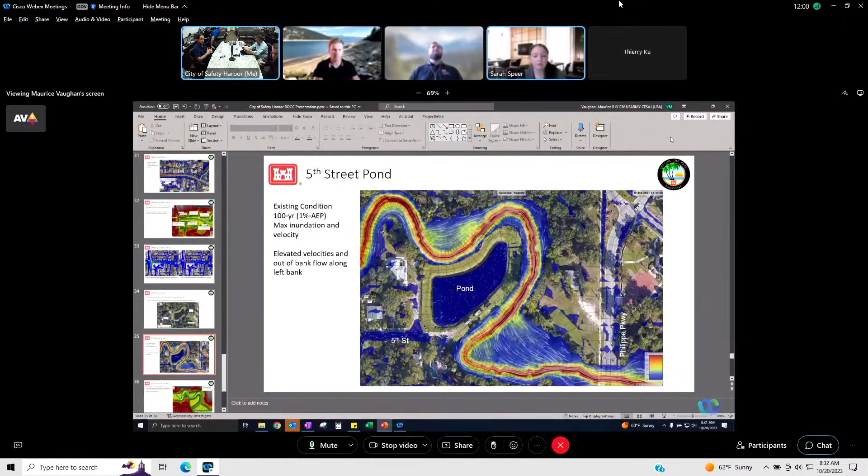Hey, Sarah and Maurice, do you guys have plans to share the presentation, or would you like me to share the presentation? What would be easiest? Hey, good morning, Matt. Yeah, I'll go ahead and share the presentation. Okay, yeah, go ahead and start on the screen when you get a chance, and let's make sure that the city can see it. Hey Matt, and when we're ready, I can kick off. Okay, thanks, Sarah.

Okay, Matt, we have everyone here, but before we start the presentation, we actually have to start the meeting, so I'll let the mayor do that. And then we'll kick it over to you guys, and just so you're all aware, we have the Safety Harbor City Commission, employees that you've been working with on this for the last year and a half, and then we have residents, mainly of Bishop Creek. Are there other residents on Mullet Creek here, or is this mainly Bishop Creek residents? Okay, all right, that's what I thought. So just want to let you know who's in the room. We're in our city commission chambers in Safety Harbor, and we're all anxious to have a discussion. So with that, I'm going to turn it over to the mayor so he can start the meeting.

Next slide. All right, so a little bit about floodplain management services. The authority for this is Section 206 of the Flood Control Act of 1960. So FPMS projects provide technical services and planning guidance. We don't actually construct anything. We write a report and do analysis and hand it over to the non-federal sponsor and say, if we were to construct this, this is what we would recommend. So it is 100% federally funded, but like I said, we do not construct anything with FPMS projects.

Usually FPMS projects are very flood-based, so timing, duration, frequency of flooding. This project is a little unique. We kind of focus on erosion due to flooding along Bishop Creek and Mullet Creek, and that was at the request of the non-federal sponsor in a letter that we got in April of 2020.

So like I said, product received, we give you guys a report. We give the non-federal sponsor a report detailing the problem identified by the project delivery team, the PDT, and the non-federal sponsor. It goes through the plan formulation process, kind of how we got to the best performing alternative. We have environmental and cultural resource compliance, so if you guys are to construct it, this is, we lay out what you guys would need to do. And then we identify the best performing alternatives and kind of everything that goes along with that.

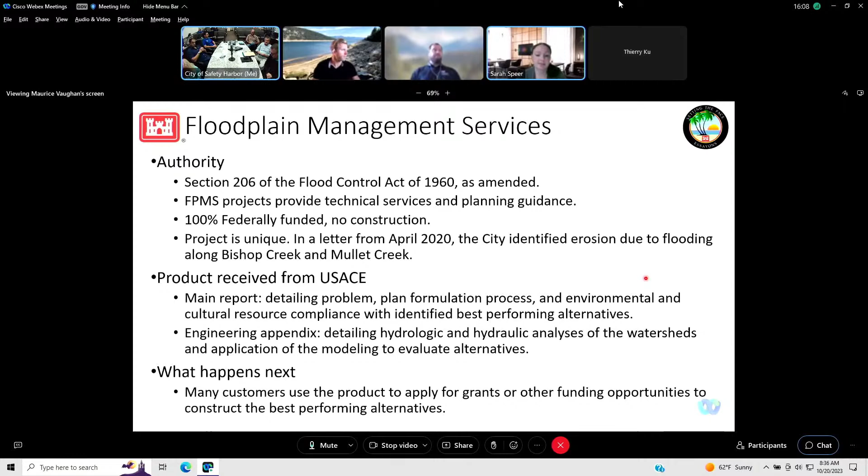And as you can see, go ahead. So can I just jump in real quick?

So just so the residents know, the reason these 7 areas of interest were identified is because these are areas of interest that residents in Safety Harbor have concerns over. So just so you're all aware, that's why there's 7 of them and not 1.

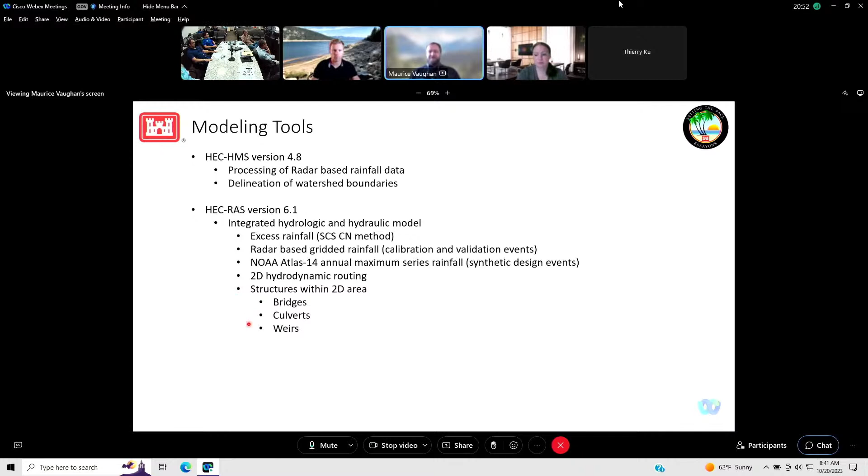For the actual evaluation of the performance of the alternatives, we developed synthetic rainfall storms. These are hypothetical storms, based on NOAA Atlas 14 annual maximum series rainfall. The model is set up fully two-dimensional, so it's highly detailed and captures all the features within the watershed. I've got some slides to show that detail later. It also includes hydraulic structures within the two-dimensional area, including the major bridges, culverts, and weirs throughout the system.

Maurice? Yes? For those of us that aren't engineers, what does the red mean and what does the green mean?

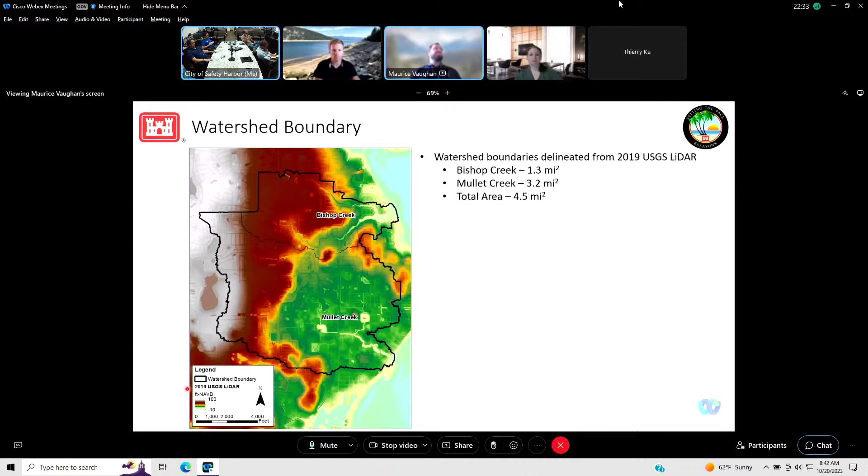For the calibration event, we analyzed Tropical Storm Elsa, which occurred in July 2021. The storm happened pretty close to when we started the modeling project, so we had good information from the city on observations in the area. There was about 3 to 4 inches of rainfall within about a 2-day period.

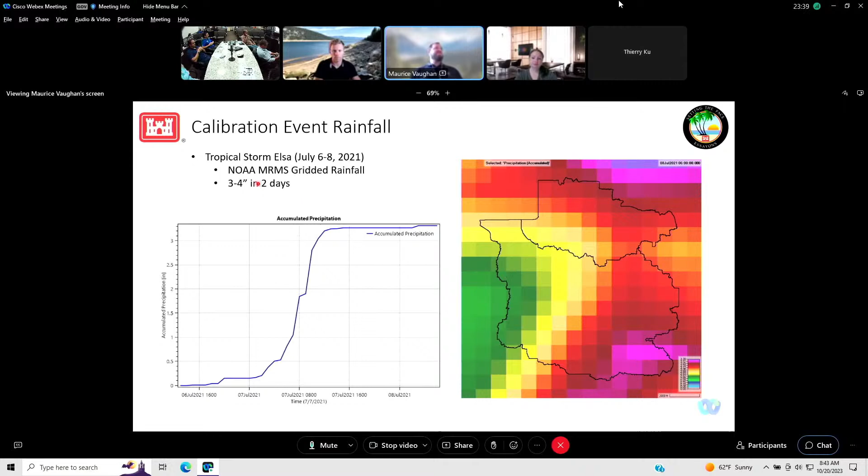Similarly, for the validation event, we analyzed Tropical Storm Debbie, which occurred in June 2012 and had a lot more rainfall associated with it. There was approximately 11 to 12 inches across the watersheds over a 2-day period, with most of that rainfall occurring in the western area of the model domain.

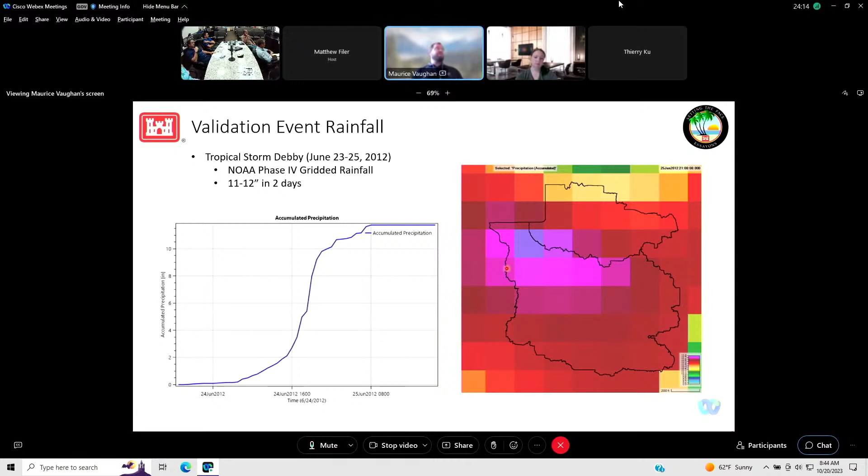For the synthetic design event rainfall, this data was used to compare existing conditions. We set up an existing conditions model and also looked at various alternatives to see how we can improve the performance of the system. The idea is to apply the same hypothetical rainfall events to both scenarios so we can get an apples-to-apples comparison.

For that analysis, we applied the NOAA Atlas 14 annual maximum series rainfall. The hypothetical storm is a 24-hour duration event, and we looked at recurrence intervals between 2 and 100 years. Those have an annual exceedance probability associated with them: a 2-year event has a 50% chance, and a 100-year event has only a 1% chance of occurrence.

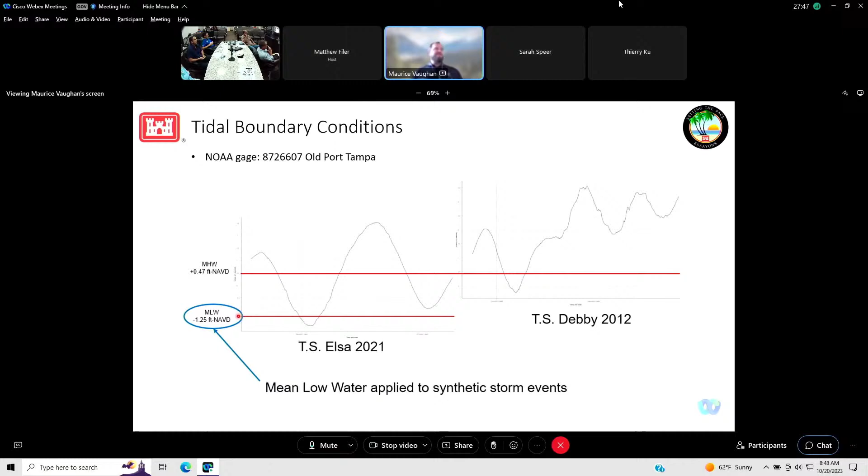For the synthetic design events, we applied the mean low water, based on NOAA datum near the modeled area. The mean low water is minus 1.25, and for comparison, I've also got the mean high water level in that same datum. We applied the mean low water for this project because, since we're most interested in erosion and high velocities, we wanted to ensure we were capturing the greatest head loss throughout the system, which would generate the greatest velocities throughout the system.

The resolution along all the roadways is about 20 feet. Within the channels it's highly detailed because we wanted to capture what was happening there, since we're interested in the velocity within the channel. So we've got a 10-foot spacing throughout the main channel reaches for both Mullet Creek and Bishop Creek, and the areas in between have a maximum spacing of about 80 feet.

Okay, so for the hydraulic structures, we were supplied the 2006 watershed management plan for the city. That included both survey information and the hydraulic model used for that study. We pulled out that information and incorporated it into our model for 21 structures that we modeled explicitly. These are structures that are close by and affect the results within the areas of interest.

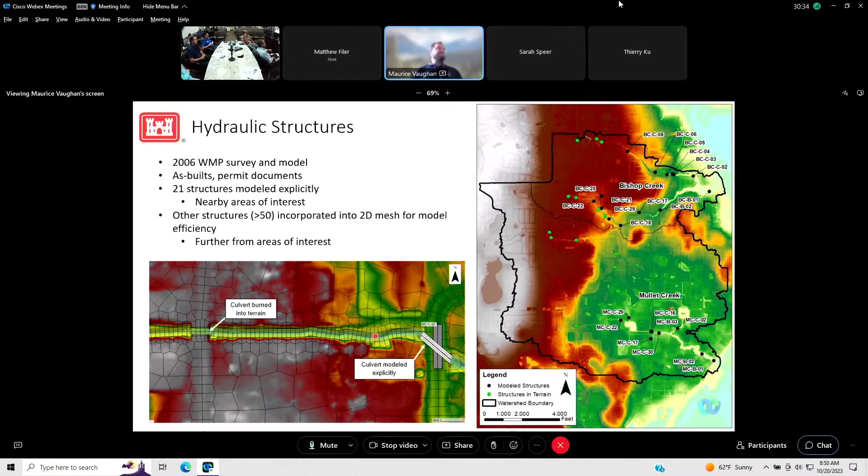Okay, for calibration results, Tropical Storm Elsa, we didn't have any actual gauges or surveyed high water marks from this event, but we were provided a visual observation along Mullet Creek at 9th Avenue North, as shown in this lower left-hand figure. There's a culvert here shown to the right - it's an arched culvert. The observation was about 1 foot below the crown of the culvert, that's about elevation 10 feet NAVD. The model actually computed about 9.6 feet, so we have pretty good confidence the model is performing well in this area. The plot above shows how the water level rises throughout that simulated period.

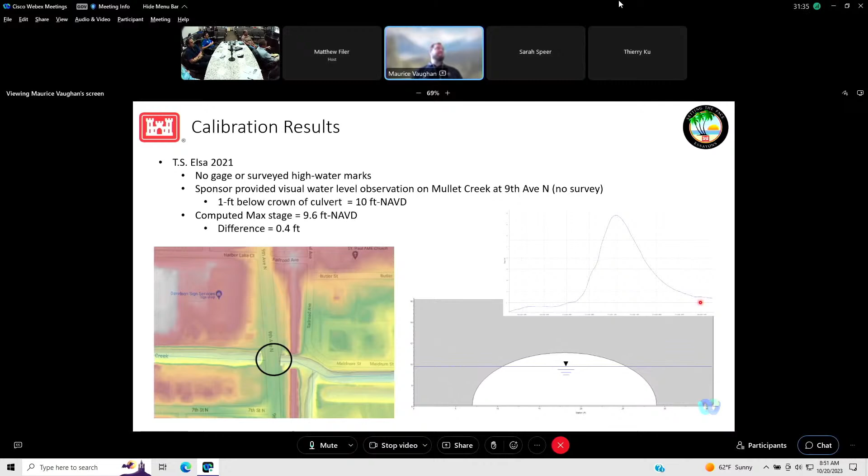Okay, for the validation run, Tropical Storm Debby, again no gauges or surveyed high water marks, but we were provided a map of observations with photos for various locations throughout both watersheds. I'm not going to go through every one of those for this presentation - I'm just going to highlight a couple of the most severe areas.

This one is the most severe I think, located along Bishop Creek, about 100 feet or so downstream of Harbor Woods Village Drive. We can see that the model computed velocities in excess of 8 feet per second, which are highly erosive. The photo to the right is from Tropical Storm Debby - we can see that the existing gabion wall structures, the existing bank protection measures there, failed, along with the fences, with a significant amount of erosion behind that. These gabion wall structures are quite porous, and over time, since these creeks are heavily vegetated, roots can penetrate those areas - you can see the geotextile behind those gabion walls. If roots penetrate, it can pull through the soil over time and you get soil loss. Eventually, with high velocities in the channel, you can see failures like this occur.

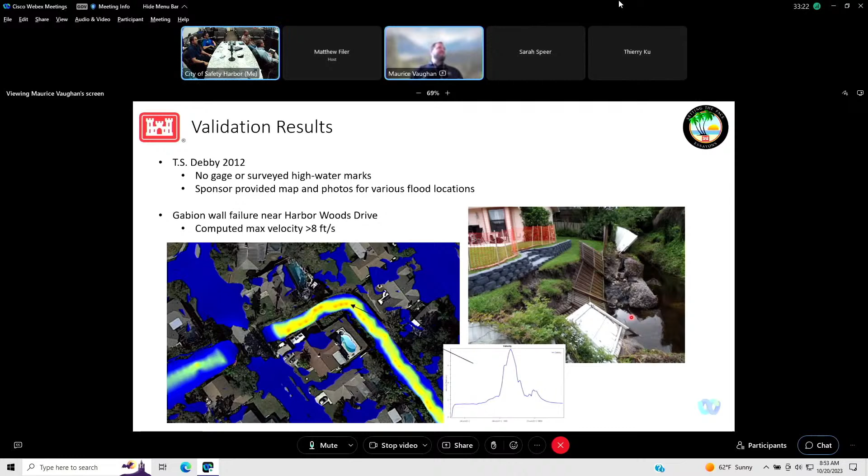So our validation seems reasonable in this area. This is another location where flooding was observed during Tropical Storm Debby - at the intersection of Green Springs Drive and Huntington Lane, right here. You can see the photo here. The model computed depths ranging between 1 and 2 feet across this intersection, which seems to match what the photo is showing.

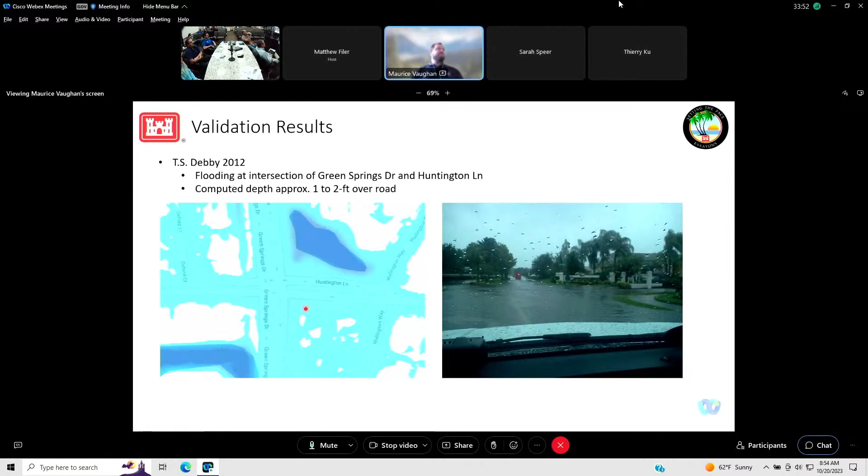All right, so I'm going to go through each of the areas of interest, and I'll touch on what some of the major issues were, and then we'll go into looking at the model results and recommended plans.

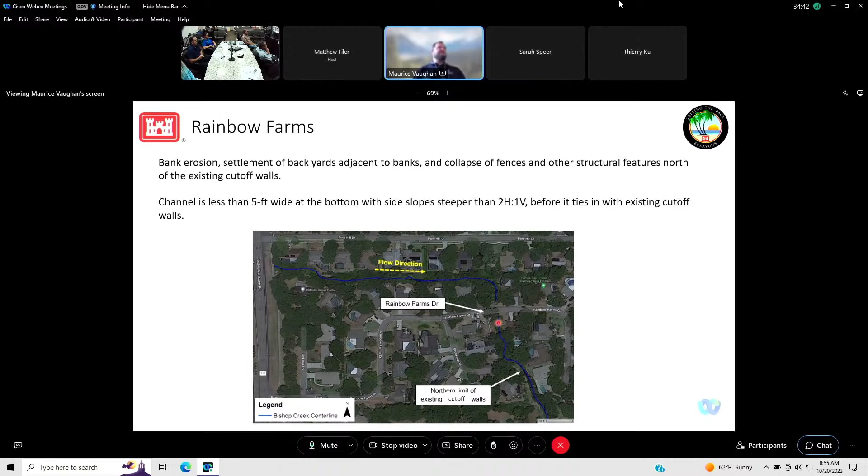For Rainbow Farms, there were accounts of bank erosion, some settlement occurring in the backyards adjacent to the creek banks, and some collapse of fences and other structural features north of some existing cutoff walls in this location. The area of interest is basically from here up through Rainbow Farms Drive. In this area, the channel is relatively narrow with steep side slopes and heavy vegetation growth.

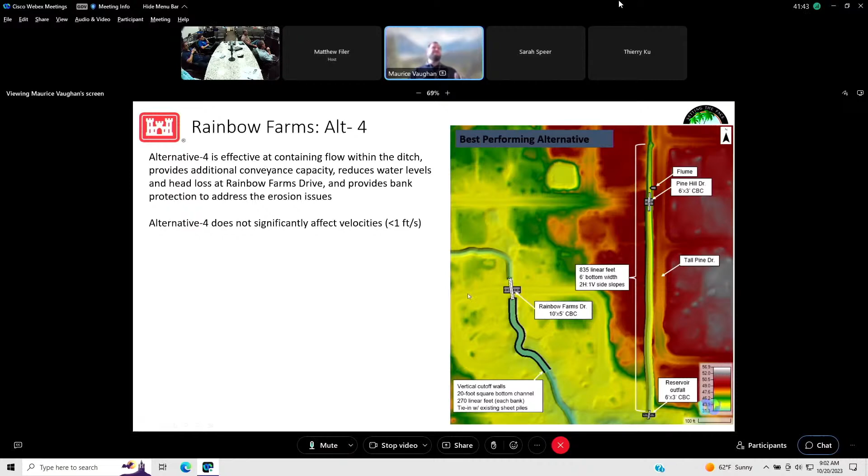So we are seeing a little bit of increase upstream due to the increased conveyance capacity, and we're seeing slight reductions downstream throughout the problem area. We're also seeing a little bit of increase just due to that additional capacity within the Tall Pine Drive area.

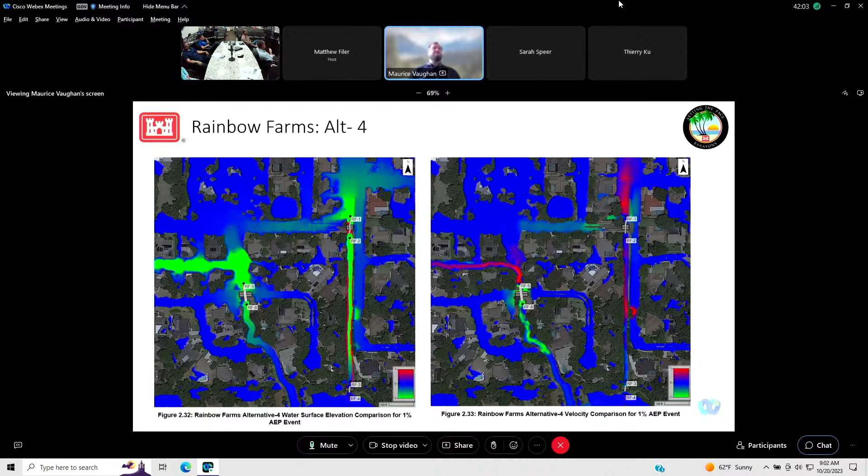All right, the next area is the Sheriff's Youth Ranch. The problem here is basically water accumulating along this Fernery Lane. There's not a curb there currently, or at least during the time we visited, and the water finds this pathway to get to Bishop Creek, through an unprotected area.

It's just a grassed area, and over time, the city indicated that over a span of about 3 years, the bank had eroded about 10 feet closer to this road.

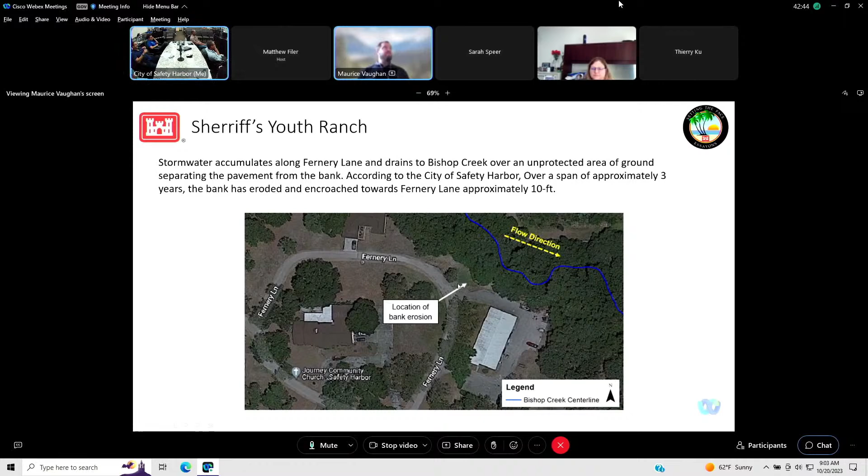Here's a snapshot of the 100-year rainfall event, and basically what's happening is this shallow concentrated flow is making its way here and finding its way down towards Bishop Creek.

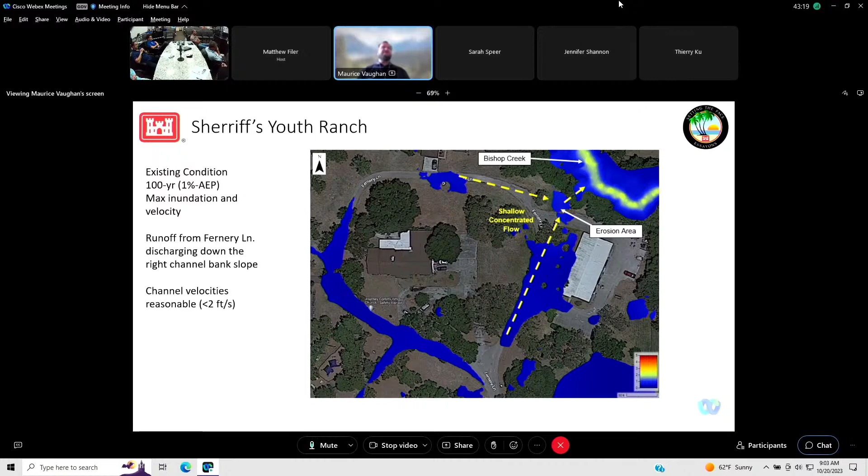In this area, the velocities in the creek aren't an issue—they're actually less than 2 feet per second, so that's not the main concern. It's really just that we need to find a way to armor this area and direct the flows to where we have an engineered outflow for this system.

So we've got 2 alternatives here. They're both relatively equal—they perform the same. It's just a matter of which one is more cost effective or depends on availability of materials and that sort of thing.

We're looking at adding about 200 feet of curb and gutter through this area to capture and direct that flow. This alternative would involve construction of a flume—a 3-foot wide open flume—to capture the water at the curb and direct it down to the bank of Bishop Creek. This would include some backfill in this depressional area, and then probably some grassing and riprap protection at the base.

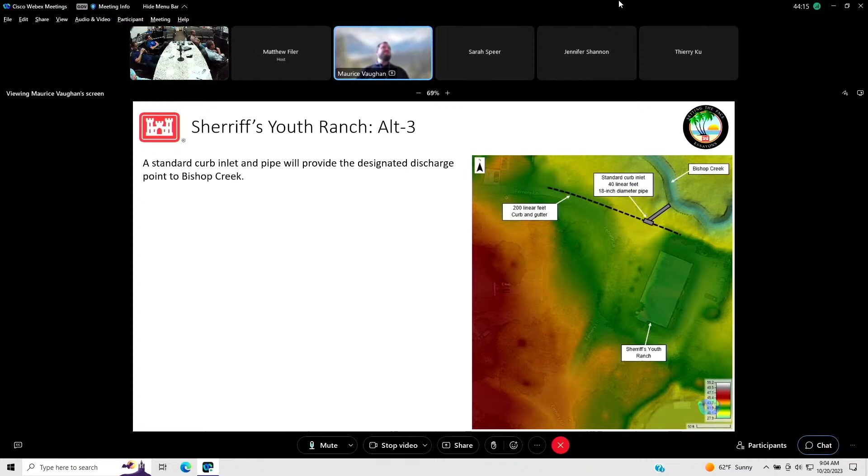And alternative 3 is pretty much the same. The only difference is instead of using a flume, you would apply a standard curb inlet, and then have an 18-inch diameter pipe that would flow out towards the Bishop Creek area.

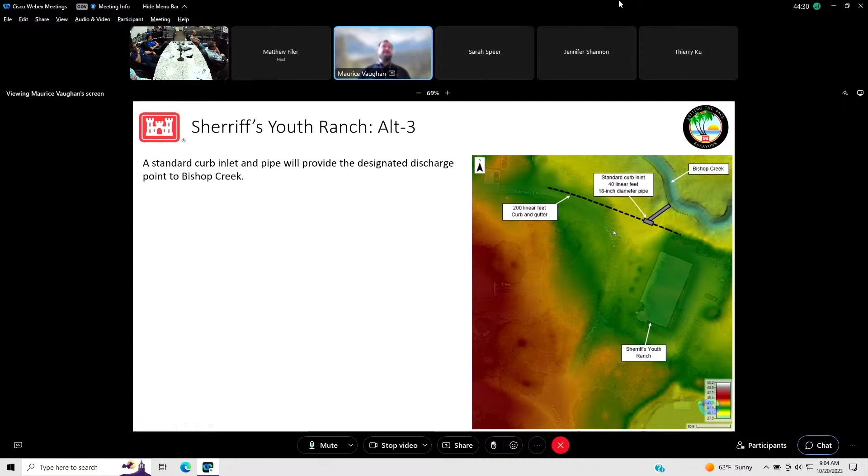All right, now we're moving on to Harbor Woods Village. This one has similar issues to Rainbow Farms, but more extreme and in a larger area. So similarly, we've got bank erosion, sinkholes, settlement of backyards adjacent to the banks, and collapse of existing bank protection measures such as the gabions we showed in the previous figure, fences, and other structural features.

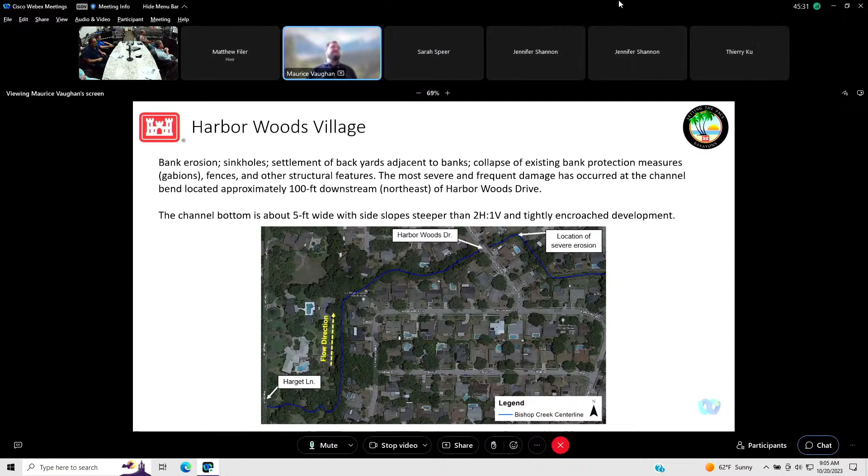Down past this bend, the homes are further away from the creek. There's more natural area through here, so this area isn't really that much of a concern—it was mainly throughout this area here.

So again, we looked at various alternatives, including home buyouts, conversion of some areas to reservoirs, and widening the channel. Due to the proximity of residential properties to the channel, there's not much room to widen it or flatten the banks, or to use other types of bank protection measures in this area other than a vertical cutoff wall.

Vertical cutoff walls are effective at increasing conveyance and reducing water levels throughout the area. While they don't reduce velocities, the cutoff walls are designed to handle the increased or currently high velocities. They also protect against erosion and the carrying of sediment and soil from backyards where we're seeing sinkholes. Cutoff walls will prevent that from happening in the future.

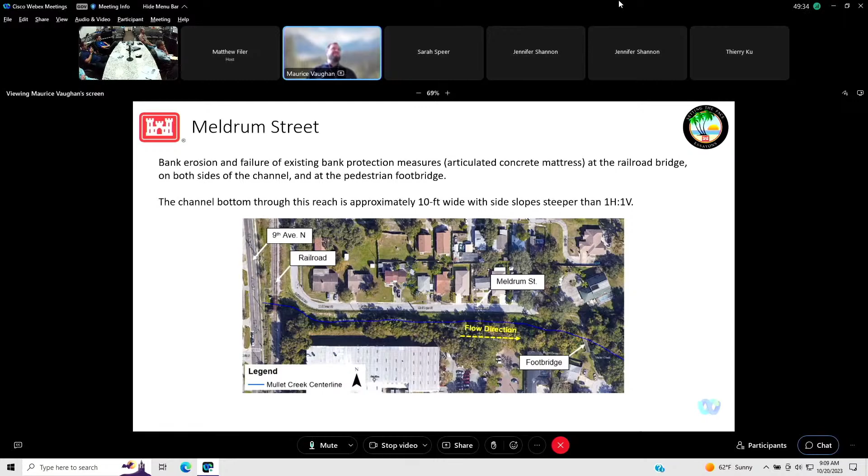For existing conditions model results, again this is the 100-year event. We're looking at velocity—you can see really high velocities, greater than 8 feet, closer to 9 feet per second, through the railroad area. The channel here is relatively flat through this area, but there's a steeper section coming out of the railroad, and we're seeing that velocity really pick up.

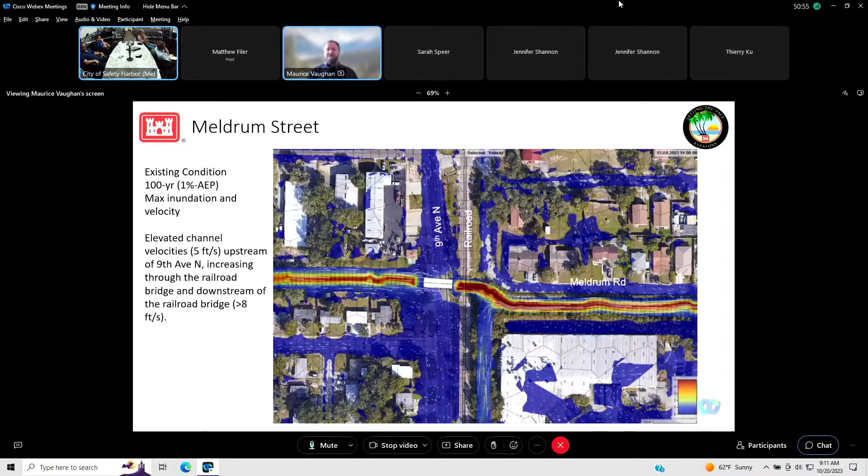A lot of rainfall is collected on 9th Avenue North, coming around the culvert and overtopping the road. There's a fair amount of water coming out of this ditch from the south, and in the neighborhood directly north of Meldrum Street, this water is uncontrolled—there's no curb along the road, so it just sheet flows over the bank. That water gets behind the cracked, vegetated concrete mattresses and over time erodes and deteriorates the foundation, causing failures.

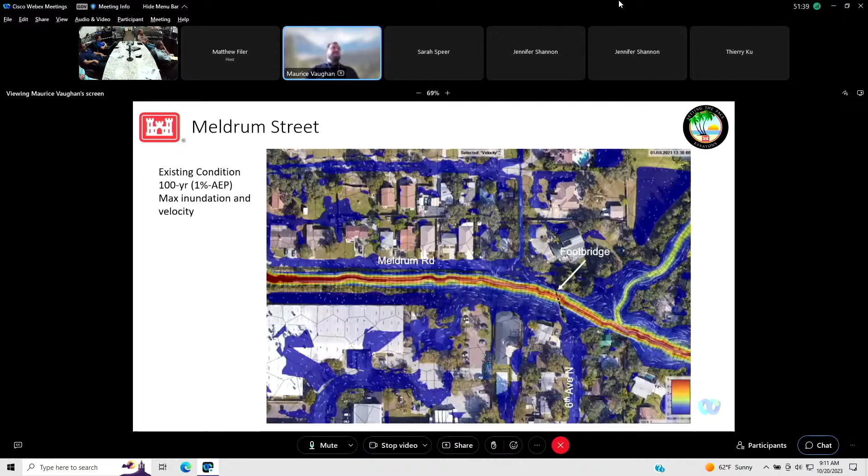For Meldrum Street, alternative 2 ended up being the best performing option after looking at several others. Its main features are installation of vertical cutoff walls starting downstream of 9th Avenue North, running through the railroad bridge, and tying in all the way down to just downstream of the footbridge, right before this tributary intersects with Mullet Creek. It also includes about 700 feet of curb and gutter along the north side of Meldrum Street, so water flowing out of the neighborhood can be intercepted and taken down towards this outfall.

I believe there's currently a small flume there. This would be upgraded to a standard curb inlet with a 24-inch pipe that would allow the water to drain directly into the creek. On the south side here, we're proposing to add in a small swale.

It's a 3-foot bottom width swale with 4-to-1 side slopes, about 180 feet long. This would pick up the water coming out of this cul-de-sac area, and also the water coming out of this depressional area, directed towards another point. This would be just a standard ditch bottom inlet with a pipe leading to Mullet Creek.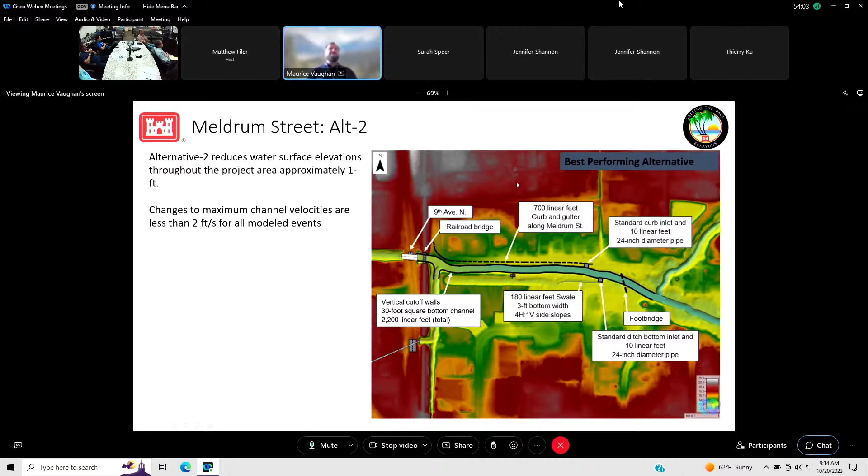I will note, because it was brought up in previous meetings, that we did analyze the potential for GeoWeb in this area. Due to GeoWeb requiring a flatter slope than what's here, and due to the proximity of infrastructure such as Meldrum Street and the berm that runs along this area, those options would encroach and effectively remove this area. So this ended up being our best performing alternative.

In terms of model results here, we're seeing some reductions in water level right around downstream of the railroad and downstream through this area. Not a whole lot downstream of there.

In terms of velocities, we're not seeing a huge difference really. There are some areas that are a little bit higher and some a little bit lower, but overall these changes are less than about 2 feet per second. So it indicates that we're not getting rid of the velocity problem, but with the cutoff walls, we're providing protection to withstand this kind of scenario.

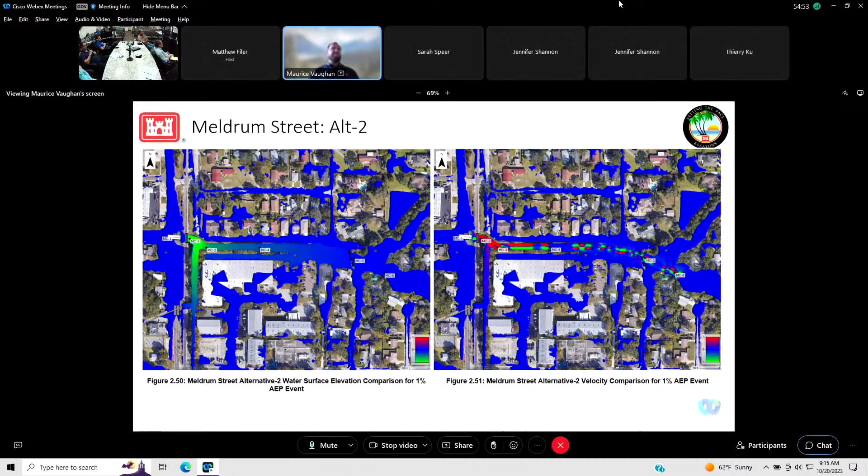All right, now the last area is the 5th Street Pond. This area, as you can see, Mullet Creek wraps around and has a few meanders as it goes around this pond. This is the Fifth Street Pond. It's got an elevated berm around it, and around this outer side of the channel, there were some indications of erosion occurring here.

The channel is wider in this area and also has flatter slopes. Steepest is about 2 to 1, but we're also seeing some up to 4 to 1 side slopes. So this area lends itself to other bank protection measures.

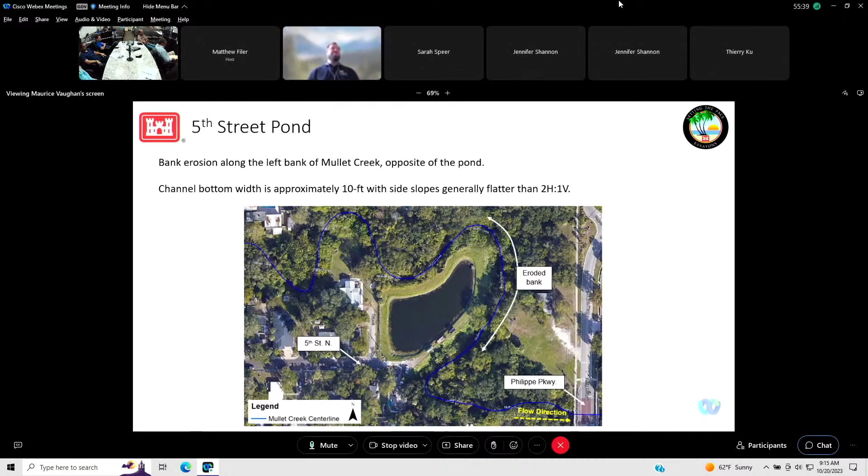This is a snapshot of the model results for the 100-year event, and we can see that overall the pond embankment is relatively in good shape here. The water level doesn't really get up to the toe of the pond itself, and the velocities around here, the blue is indicative of relatively low.

Most of the higher velocities are around the outer bend, which we expect, and for an extreme event like a 100-year event, we can actually have water that bypasses some of these oxbows, and those are areas that would be hot spots for erosion.

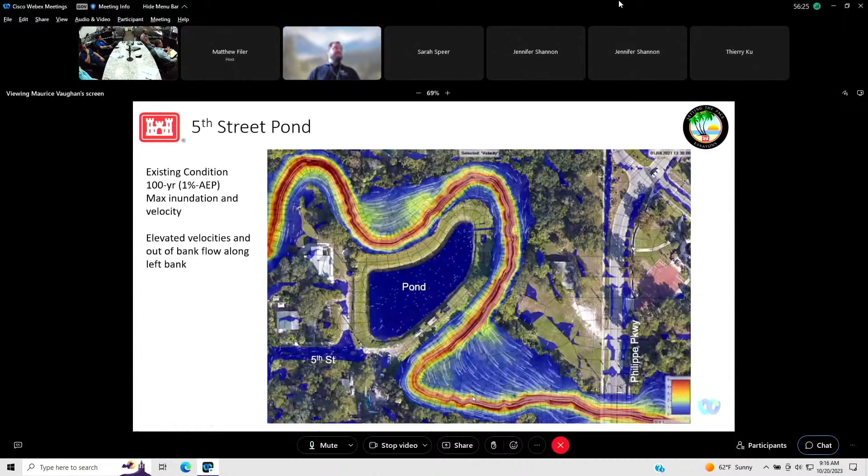So for our recommended or best performing alternative in this area, it would just be application of bank stabilization along this outer bend, starting here, wrapping around this area, just along the slopes.

And then for the Sheriff's Youth Ranch, this would be the application of curb and gutter with either a flume or a curb and inlet pipe. Both of those would be around $20,000.

Harbor Woods Village, this is the installation of cutoff walls along that entire reach, which is about $2.4 million. Meldrum Street, we've got cutoff walls along with the curb on Meldrum Street and the curb and ditch bottom inlets along the north and south bank of the creek. That one's about $4.4 million.

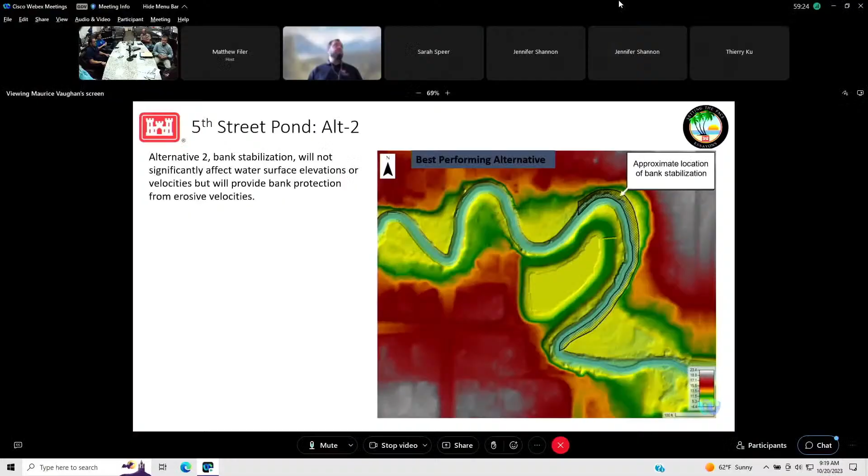Okay, thank you. Can you go back to the Harbor Woods Village slide, please? Which one? This one? That one will work.

So the question is, the vertical cutoff wall stops at some point, right there. Why doesn't it continue another 7 properties, 4 on the north side and 3 on the south side, to the open area just south of the park?

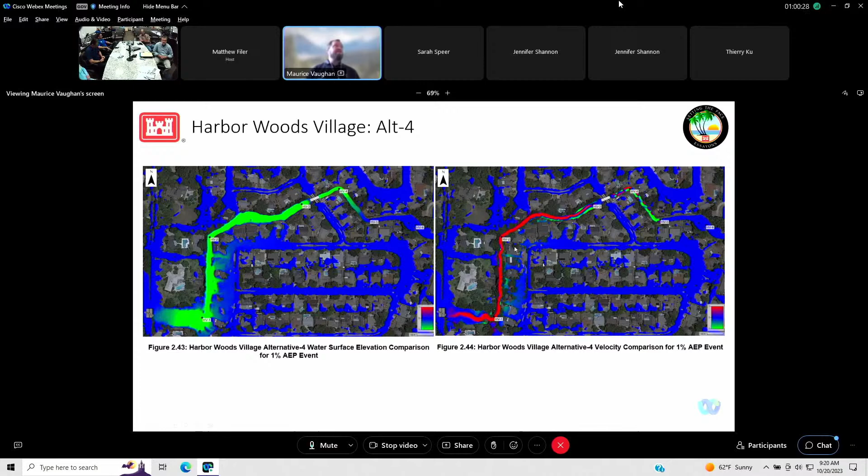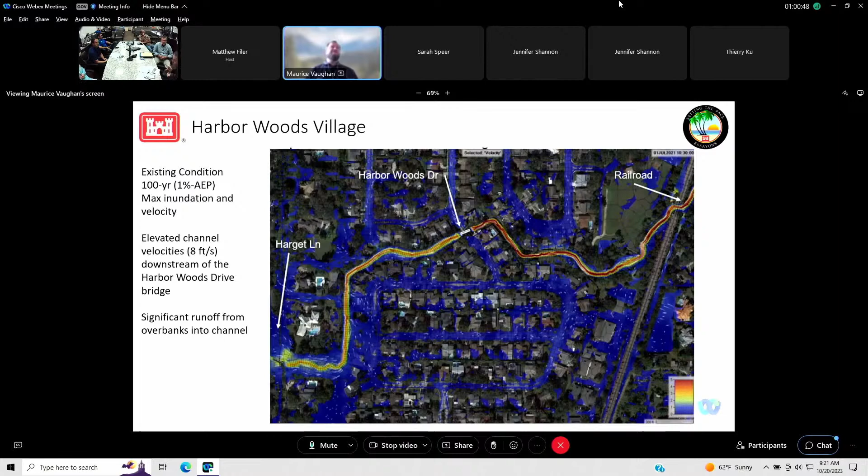So we stopped it here. Looking at the topography, you can see that the floodplain flattens out, so we don't have nearly as much encroachment with the actual homes, and there's more flow capacity here. In the model results, down here we're not seeing as much of that overbank flow from the properties into the creeks. It wasn't necessarily showing that area was having the same issues, but that doesn't mean it couldn't be extended downstream. That's just where we stopped it. We didn't want to go overboard, trying to be as conservative as possible.

As far as cost goes, the Sheriff's Youth Ranch, is that their property? That's not city property. You're correct, the Sheriff's Youth Ranch is their property, and Fernery Lane belongs to them, so that loop is their property.

I'd like to speak up for the county. This is Jennifer Shannon. We stopped working on the Meldrum Street design based off of this study. Usually when we work on stormwater improvements with other municipalities, we share the costs by who owns what percentage of the watershed, so you could wind up paying more than 50% based on the percentage of Safety Harbor that's in the Mullet Creek watershed, and maybe even have to share some of it with Clearwater, as they're at the most upstream end, west of McMullen Booth Road. So you might want to look at the percentage of Safety Harbor in the Mullet Creek watershed before trying to understand the budgetary responsibilities to that piece. Thank you.

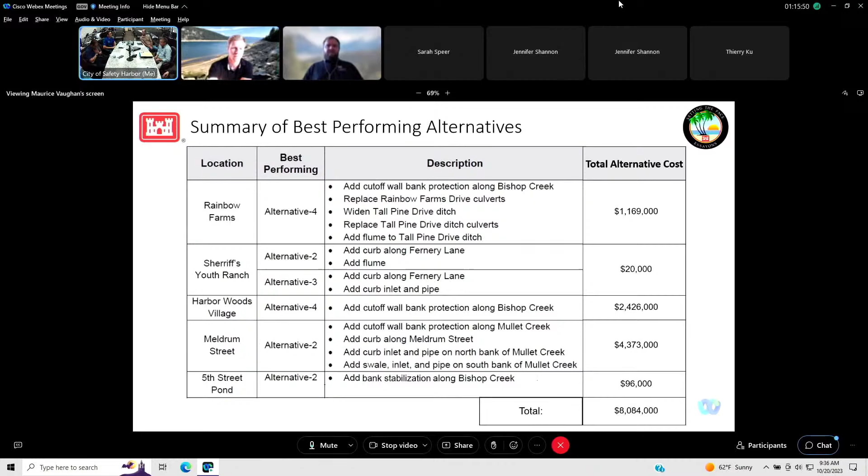One more question for me. If this report that you all put together was done by the private sector, what do you think the value of it would be?

I'm not sure if I'm really in a place to answer that question.

Just a question for Maurice. Based on your modeling experience, and getting back to the discussion on purchasing individual properties, water doesn't like making 90-degree bends. So comparing all of the vertical cutoff walls, was part of your evaluation looking at single or double properties at the 90-degree bends, to see if purchasing that and some kind of water control structure there, like a pond, could be used to either slow down the flow or collect some of that excess capacity during an event? Was that included in the analysis, or would you think that looking at that might make a difference in slowing down the downstream velocities?

Yes, in fact we looked at two different alternatives, exactly to your point. Immediately downstream of Harbor Woods Drive, we looked at the potential acquisition of 10 properties that went around that 90-degree bend, converting it into about a 2-acre pond with a downstream control weir, a 2-stage weir. It basically eliminates velocity within that area, but there's no changes upstream, so it doesn't have any impact upstream of Harbor Woods Drive. It's just an isolated scenario.